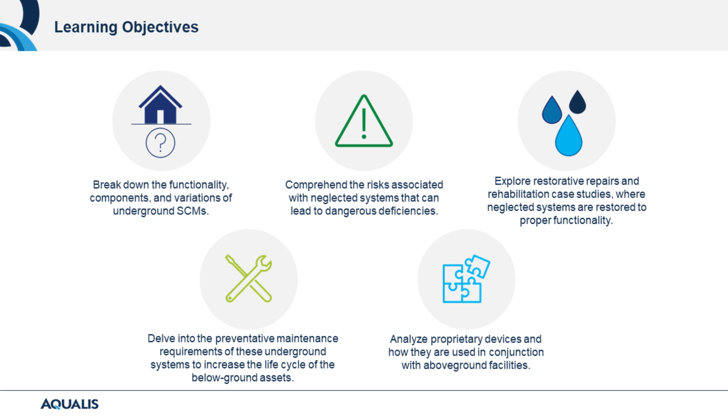As with all stormwater assets, preventative maintenance is essential to extending and preserving the life cycle of these underground stormwater infrastructures. So we will also discuss corrective maintenance, which tends to be a common practice for these neglected systems. And it would be impossible for us to talk about underground infrastructure without addressing proprietary devices. As I mentioned, we're going to walk through a case study that includes a neglected stormwater vault with the use of proprietary filter cartridges.

So we've established our learning objectives, let's go ahead and get started. In this next section, we're going to address industry standard underground SCMs and proprietary devices.

When we're looking at underground systems, we're going to discuss stormwater control measures that treat water quality and water quantity. Since there are so many variations of underground stormwater systems, this webinar could take the entire day, but we're going to briefly introduce a few of these systems and then dive deeper into maintenance and repair protocols.

There's more below the surface, and much like icebergs—we're going to refer back to this iceberg today—underground stormwater infrastructure provides more than what meets the eye.

In many cases, these systems are utilized in parking lots and roadway infrastructure, commercial, residential, and industrial properties, moving water from impervious surfaces and directing that runoff to these systems to manage peak volume, quantity storage, and slow water release. Essentially used in areas where property utilization isn't available above ground.

We commonly see this in the Northeast and highly densely populated areas. These solutions are very successful in treating not only quantity, but also the quality of stormwater runoff.

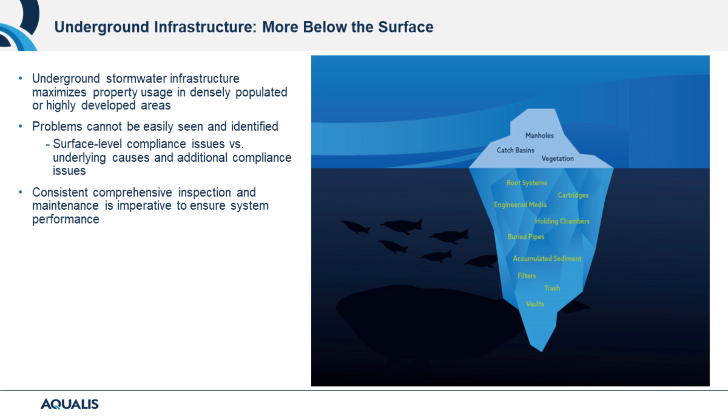Identifying these deficiencies before they develop into structural integrity issues ensures the life of the system and reduces environmental impacts and concerns.

Engineered underground SCMs offer flood control, reduced erosion, and groundwater recharge, and by slowly moving stormwater runoff from areas with densely impervious surfaces, this solution can move the water to slowly reintroduce it to the watershed.

These include large pipe systems which slow down and hold that stormwater runoff, commonly paired with proprietary devices so that water quality can also be treated.

We typically hear that underground stormwater infrastructure is only a solution for water volume, but solutions to hydrocarbon, phosphorus, and other heavy metals can all be treated with these proprietary devices, especially depending on the region and the pollutants that need to be targeted.

Underground SCMs filter, settle out, and separate stormwater pollutants that may be present. Sediment in catch basins settles to the bottom, and then filters remove those pollutants and slowly reintroduce that filtered water. Installed beneath parking lots, streets, and open spaces, these provide additional public safety and security in comparison to above ground stormwater ponds.

As mentioned in the previous slide, underground systems really do maximize the space below ground to minimize impacts to the land above, optimizing property usage. They're aesthetically appealing since these systems are found below ground and don't impact landscapes or design of properties.

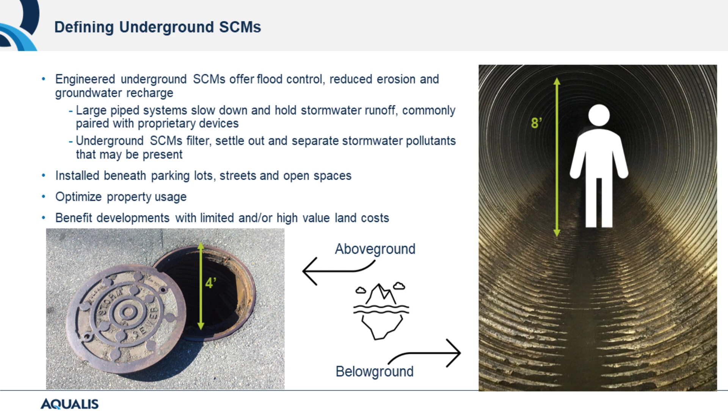These benefit developments with limited and/or high value land costs. From the picture, you can see the footprint is horizontal placement within 4 feet that is undetectable or causes minimal disruption to above ground land use, in comparison to 8 foot diameter corrugated pipes, where you see the actual scaled photo to the height of these pipes installed underground.

So, proprietary systems and devices. These are manufactured—either prefabricated or customizable—stormwater management assets, and the treatment devices can be categorized as either filtration or separation. Within the separation category, this can also be further broken down into chambered and hydrodynamic.

Later we'll talk through a hydrodynamic separation device as well as a filtration proprietary device. Permanent stormwater treatment products treat stormwater before discharging to another BMP, like large corrugated pipes, or to a body of water, and can be underground or surface level with underground components.

These off-the-shelf stormwater filtration products minimize engineering costs. These are tried and true methods for water quality treatment.

So they are a popular solution that ensures water quality is established to protect the local watershed. Within this process, working with engineers and regulators on the quantity of devices needed to capture that optimized result for pollutant removal is essential. It also preserves that high value land space like we talked about in the previous slide.

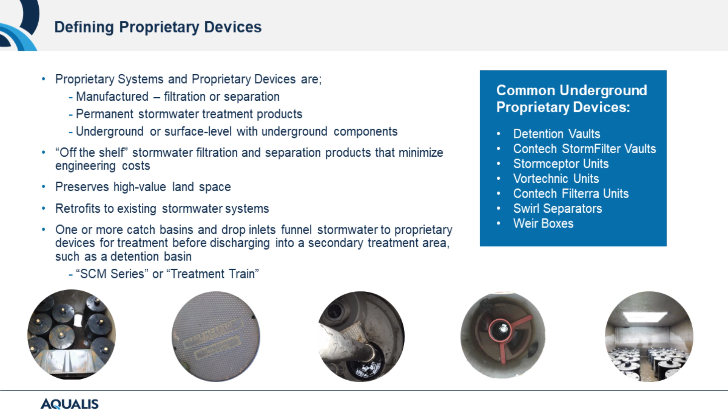These retrofits also apply to existing stormwater systems, so they can easily be installed to already existing infrastructure at a low cost but with high impact on water quality treatment. One or more catch basins and drop inlets funnel stormwater to proprietary devices for treatment before discharging into a secondary treatment area such as detention basins. These are what we call SCM series or treatment trains, all working in complete harmony to move stormwater and runoff and remove pollutants.

Underground and proprietary systems utilize a combination of both natural and engineering processes to manage or treat stormwater before it's released into the environment.

Back to that treatment train, as we just discussed, these systems aren't a one solution, but typically used in combination to ensure proper management of runoff, to avoid flooding, and treatment to ensure environmental quality standards and to further protect the watershed. Filter materials can include sand and natural filter mediums, manufactured filter mediums, hydrodynamic forces, and porous soils. But it's really important to note that the medium chosen is the best solution to treat the specific pollutant. This all depends on the region and the targeted pollutant you're trying to remove.

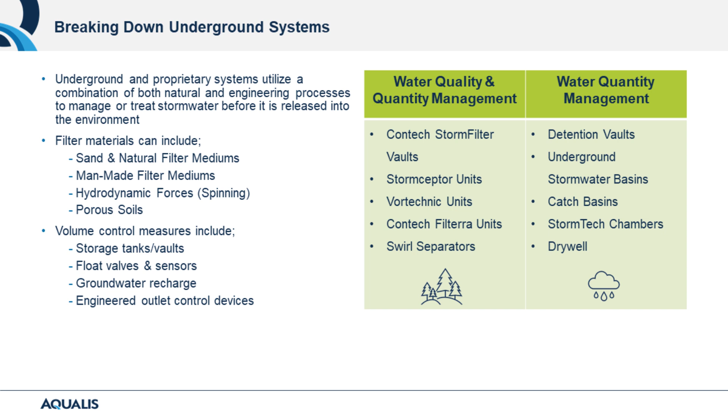Volume control measures include storage tanks and vaults, float valves and sensors, groundwater recharge, and engineered outlet control devices. Most underground systems, including those listed, do offer both quality and quantity management, but have one or the other as their primary focus and goal.

These systems take that flow of water underground through pipes, eventually to the pond or the watershed, and are usually found in parking lots and roadways. We do expect there's going to be normal wear and tear, as these systems are typically that first line of stormwater defense in parking lots, and with that we see a lot of failures.

The failures we see that decrease the life cycle of a catch basin include trash and debris, which blocks the function or proper drainage, and concrete and brick deterioration or mortar deficiencies. Stormwater can pass through the identified deficiency, saturating that outside soil, and then that soil can backwash into the catch basin, which ultimately causes a void, and that eventually causes a sinkhole.

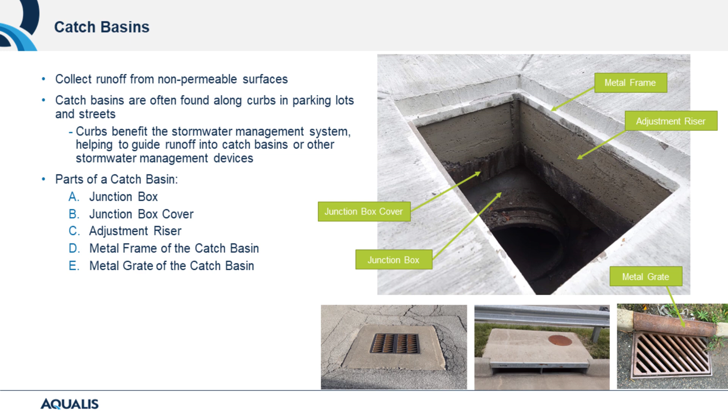The metal frame of the catch basin is used for support, and then the metal grate, of course, for the catch basin, which is the common look for the catch basin.

So we're now going to talk a little bit about detention vaults. So detention tanks or underground storage tanks, these are all utilized to store peak volume runoff flows and release the water at a slower rate.

Underground storage tanks can be made from concrete, steel, aluminum, or plastic materials. We're going to walk through a case study a little later on in the presentation regarding detention tanks and their common deficiencies, stemming from that lack of maintenance and inspections.

These systems are not designed to enhance water quality, and they're typically used with those proprietary devices to meet stormwater discharge quality requirements. These types of systems can have issues with weight restrictions like overcompaction, above ground weight from inventory staging, or large vehicle overpassing.

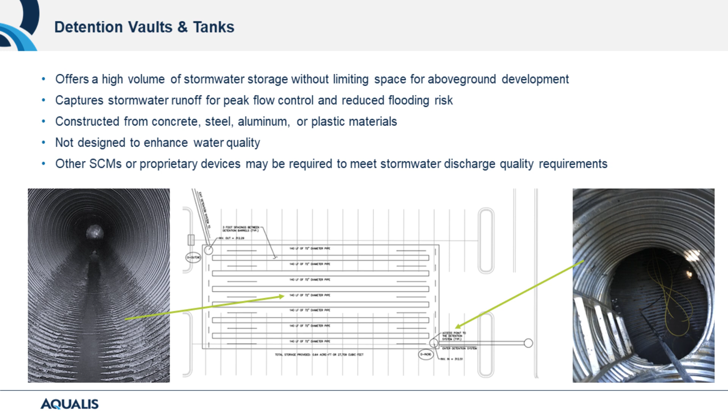Corrugated metal pipes are prone to rust and corrosion, and without proper maintenance, water pools and collects over periods of time, just due to sedimentation blockages, including joint issues as well.

So the proprietary filters, these are located within stormwater vaults or detention tanks. These filters house rechargeable media cartridges to target different pollutants like TSS, hydrocarbons, nutrients, and heavy metals. As I mentioned earlier, the media chosen really depends on the specific pollutant that's being targeted.

This includes natural or engineered medias. So these cartridges trap particles and absorb the pollutants. Float valves are housed in the center of the cartridges open once the cartridges are full of filtered water, releasing the water at a slowed, specified rate.

Preventative maintenance is essential here, preserving the lifespan of these systems, so that proper water quality is upheld and the treatment is targeted appropriately. Maintenance includes cleaning the vault and the tops of these filters, and depends on how well the areas above ground are really maintained to extend the life cycle of these systems.

Is street sweeping occurring often to prevent heavy sediment accumulation? Is the vault being inspected for increase in trash accumulation? These are all things to consider to ensure the life cycle of these proprietary devices.

In general, we expect 1 to 5 years of life expectancy, but they can be extended when proper preventive maintenance, which includes either vactor and jetting of the vault on a routine basis, really can help extend that life cycle.

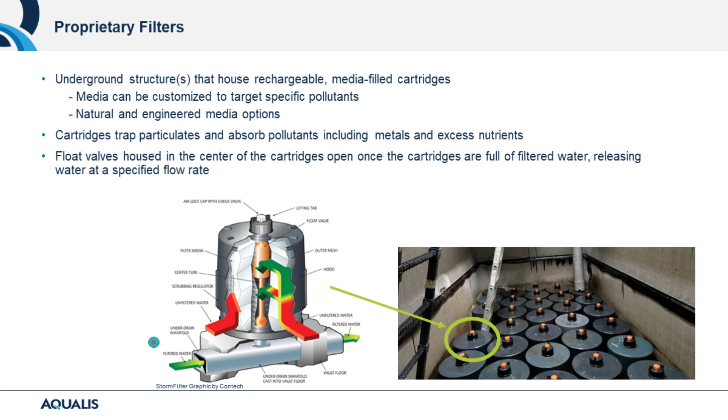I'm going to show this animation where this is showing as the water and the pollutants come into the filter, the pollutants remain, and the clean filter water is washed out.

So chamber units, or those hydrodynamic separators, provide effective solutions against pollutants in stormwater. They work by water bypassing the lower chamber to prevent disruption of previously removed sediment and petroleum that is accumulated within the lower chamber.

The free oil then rises and is trapped under the insert. The treated water then bypasses the weir during infrequent high flow periods while diverting sediments and floatables. Routine inspections ensure oil and sediment accumulation rates are monitored, and frequent vac truck cleaning removes those collected oils.

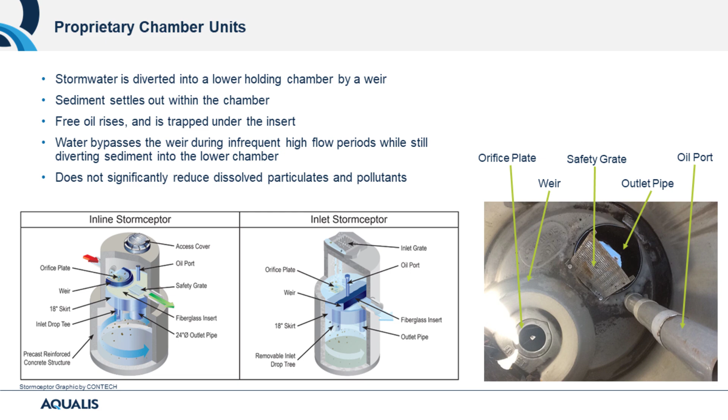So we'll go ahead and we'll show how the system works with animation. This is during normal operating conditions. The water flows in, and the larger oils and sediment are separated, the oil is trapped, and then the water swirls out to be removed to the outlet, to the rest of the treatment train.

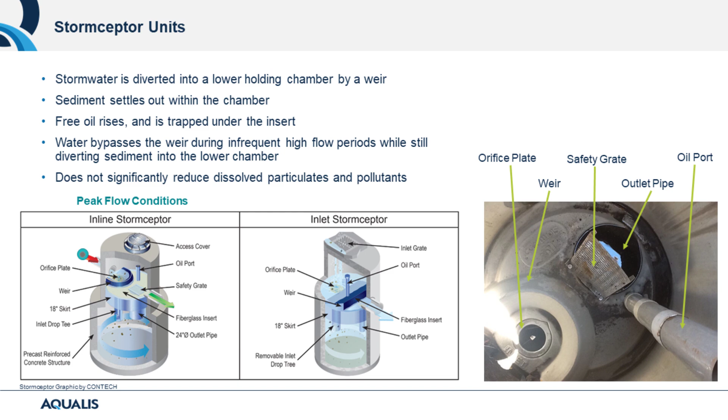Now we're going to show during those peak flow conditions. During peak flow, the water bypasses the lower chamber to prevent disruption of previously removed sediment and petroleum that has accumulated within the chamber.

Next we're going to address those implications of underground stormwater system neglect that we've talked briefly about. Referencing back to our iceberg, when problems reach the surface, it has likely been an issue for a while.

The out of sight, out of mind mentality is very prevalent with underground infrastructure, especially for those who may not be aware of the assets they are either required to maintain or that they own underground on their property. These assets are especially prone to failure, as areas of concern are challenging to identify by everyday visual signs. More often when in disrepair, it is extremely costly to correct.

Problems may only be noticed once they come to the surface, literally, like sinkholes, pooling of water, as we see in this photo right here.

An overall lack of awareness is a common factor we tend to see with these systems, like poorly maintained stormwater assets due to turnover in positions. We see this frequently in locations where the next manager isn't aware of the responsibilities that they hold. Deficient knowledge of regulations means there's unawareness of proper regulations or O&M agreements on their systems.

There's costly repairs required to get the system back to design function. Simply put, it's expensive to repair, and some just don't have the budget unless motivated by a compliance issue. So the property owner might not move forward with repairs until absolutely necessary.

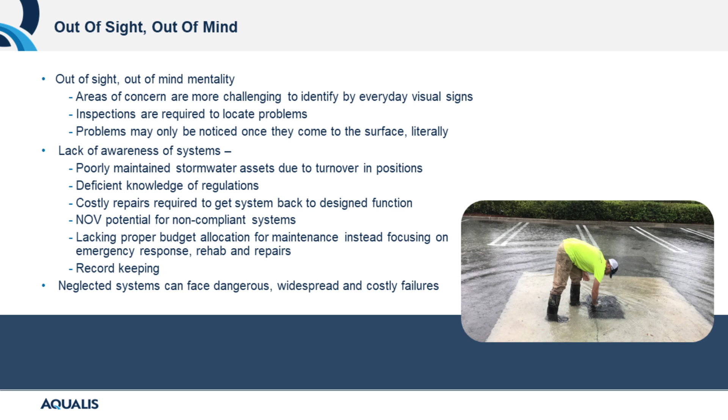Neglected systems can face dangerous, widespread, costly failures, so sinkholes and flooding, just to name a few, especially when you want your system to function as designed during historic rain events. Failures can quickly be exacerbated by the condition of the underground systems.

So, common signs of deficiencies. We've talked briefly, but we're going to break them down a little further here.

Buildup is especially visible in and around inlets and catch basins. Due to their design, this is where trash and debris is meant to build up, but if routine removal of trash is not upkept, the catch basin can be completely blocked, which ends up causing flooding. Hydrocarbons are commonly found in the catch basin, so proprietary devices can assist with capturing these oils and sediments, debris and trash—all clog-producing items that are easily treatable with routine preventative maintenance.

Cracking and settling does not always warrant further action, but it's important to monitor catch basins to ensure system function, safety, and compliance continue to be met.

Damaged piping is detectable with underground pipe camera inspections and preventative maintenance inspections by verifying proper water flow and sediment buildup. Many times, property owners are only alerted to this issue when there's pooling of water or sinkholes forming above ground.

Consistent bypass typically leads to bigger issues like sinkholes and water pooling, as the runoff is not reaching the water treatment cells.

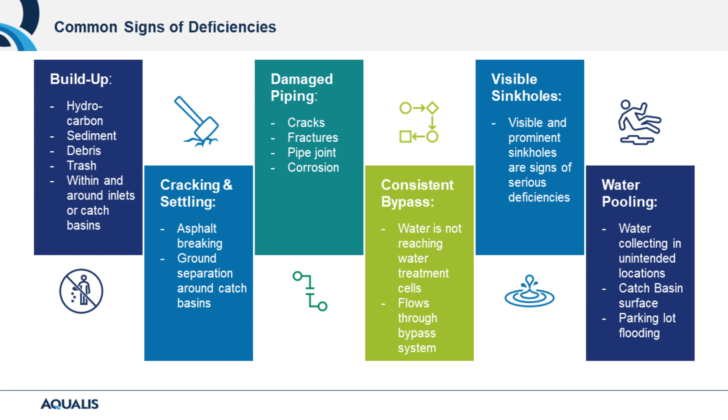Water pooling is usually indicated with flooding in parking lots or water collecting where not originally designed or intended. As we walk through each of our case studies, we're going to revert back to these deficiencies as the recognized defect or system failure.

Sinkholes require immediate attention, and as we addressed with the iceberg, when these reach the surface, it typically indicates a larger issue below. Collapsed subsurface hollows that appear as depressions in the ground surface, in which rainfall can drain, is a really good definition of sinkholes.

Water displaces the soil and creates this concave cavity. Structural defects involving piping or other below-ground stormwater infrastructure that has become defective are commonly the causes of sinkholes.

This includes legacy piping and aging infrastructure, which are at risk of failure or at the end of their life cycle. Underground infrastructure is at risk of creating sinkholes when pipes crack, fracture, or have structural failures.

Root cause analysis really needs to be implemented through underground video pipe inspections, either smoke tests, percolation tests, water dye tests, or geophysical studies or surveys.

When water escapes pipes and flows over surrounding rock structures, it erodes cavities that eventually collapse, and these also form sinkholes. Just as that cavity can form around a catch basin, that same process can occur around any piping with faulty joints, cracks, fractures, or an increase in compaction or weight.

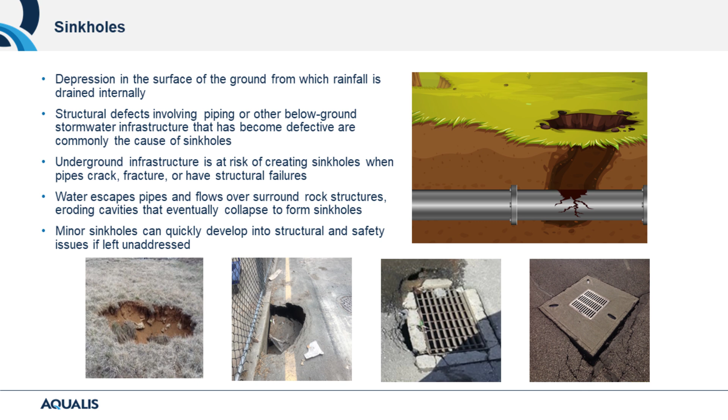We talked a lot about preventative maintenance, but we want to make a point to discuss corrective maintenance. This is a degree above preventative maintenance, when we need to take a site back to compliance, due to a length of time where the system has been neglected. Repairs and major restorations can be added into this category as well, but we're going to address repairs as its own category in the next slide.

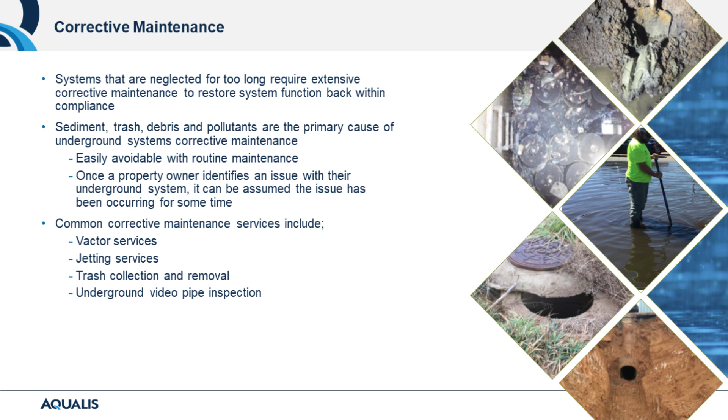Common corrective maintenance services include Vactor services, jetting services, trash collection and removal, and underground pipe inspection or CCTV inspections. We're going to break each one of those down in the next slide as well.

Additional to corrective maintenance, the following are solutions that diagnose, treat, and inspect underground systems. Underground pipe services—this technology can identify suspected pipe damages, operational obstructions like the accumulation of debris, sediment, root intrusions, and compromised systems with complete pipe collapse or serious defects. For preventative purposes, pipeline condition can also be verified, detecting minor defects due to installation, assessing overall pipe health, and ensuring the life of the underground pipe.

Vactor services—utilizing high suction power, these trucks collect and remove large volumes of debris of both wet and dry solids.

This can be used in combo with jetting to clean catch basins or vaults to remove accumulated sediment. So jetting services use high pressure water to dislodge sediment and clear compacted buildup. This solution is environmentally friendly and highly effective to clean and maintain underground systems.

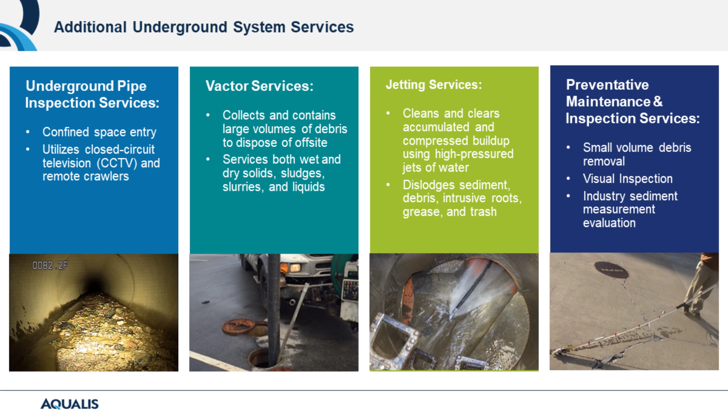Preventative maintenance and inspection services are management programs that provide routine maintenance on a monthly, quarterly, or even biannual schedule. This includes visual inspections, sediment measurement, evaluation, debris removal, and reporting deficiencies over time. Having a professional familiar with the system includes consistent photos over time to watch deficiencies if they're small and monitor them should a repair eventually be needed.

Underground repairs are essential, and even with routine maintenance they can be inevitable. This can be due to aging infrastructure, even human error such as damage from cars or vendors lacking knowledge of these systems, which is one of the case studies we'll talk about soon. When corrective maintenance is not sufficient, restorative or rehabilitative repair can then be applied.

Repairs include pipe replacements, pipe lining repairs, structural repairs, and sinkhole repairs, which we can break down into rehabilitative and restorative. Restorative repair consists of a variety of isolated or small-scale maintenance work needed to address operational problems, so simple grate or drain replacements and even Vactor work can fall into this area.

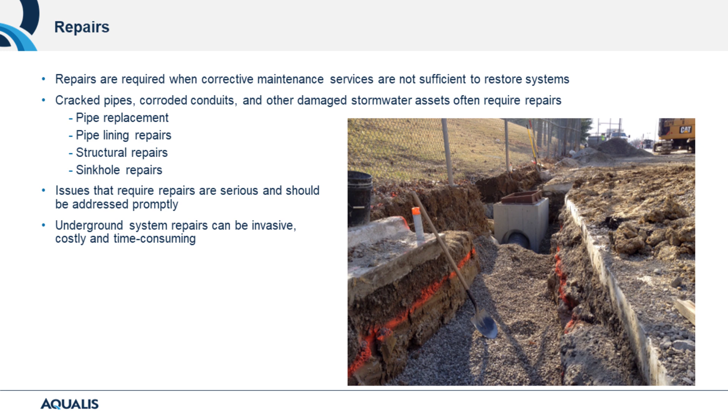Rehabilitative consists of large-scale maintenance and major improvements needed to address failures within stormwater management facilities. This work may require an engineering design with construction plans prepared for review and approval, specialized maintenance equipment or surveying, construction permits, or assistance through private contractors and consultants. In general, if large equipment is required to work underground, this repair is probably rehabilitative. As with any deficiency in underground systems, these need to be addressed swiftly to preserve the entire SCM treatment train's performance.

Now it's time to dive into some real-life examples that include restorative repair, rehabilitation, and corrective maintenance.

This is a great example of ensuring preventative maintenance has been provided, but human error interfered and resulted in a major rehabilitation project. This site repair is in Florida and still in progress, but the stormwater vault ceiling was damaged by a parking lot vendor who went to repair and replace a portion of the asphalt. Unfortunately, the vendor didn't refer to the site plan or the multiple weight limit signage on site that would have indicated something was going on underground at this retail location.

The vendor ultimately drilled holes into the vault, altering the structural integrity, thinking it was control joints. The site had to be blocked off as engineering and city officials coordinate to ensure the repair is appropriately addressed. Issues currently facing this location include that it's rainy season in Florida, and we need that vault to be dry to begin work, as well as getting our hands on precast construction materials.

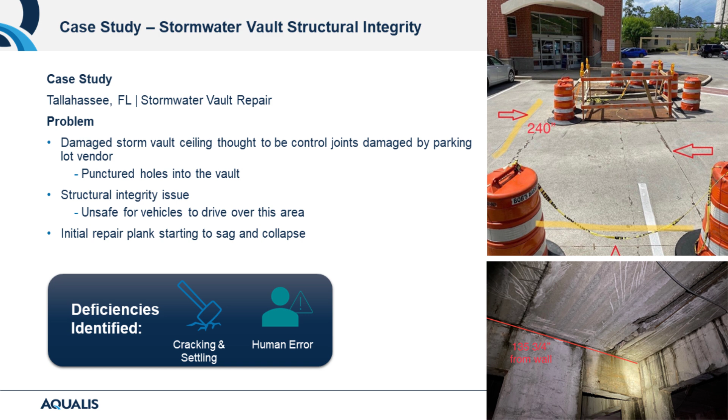We really thought this was a timely case that came up as we were organizing this PowerPoint, and found it essential to showcase how missing education about these systems can cause major deficiencies in underground systems. Even when you do everything right, sometimes it doesn't matter, like in this case—so it's not only out of sight, out of mind for property owners, but for all vendors working in and around these systems as well.

This next case study is one from Arizona that we currently have in progress as well. Due to the nature of the geography and topography in Arizona, above ground real estate isn't adaptable to stormwater infrastructure, and ponds just aren't as prevalent in that region. Since rain is infrequent, these systems are 20 to 25 years old, made of corrugated pipes and deep dry wells, which are developed to send water right back to the water table by reaching permeable soil where it can infiltrate back into the soil. In fact, Arizona is one of the states with the largest dry well programs, with over 52,000 throughout the state.

But the site experienced a lack of maintenance for quite some time, so sediment was not flowing out appropriately and water began to pool and remain in the pipes, causing corrosion and the pipes to eventually rust out. The water was bypassing and infiltrating the surrounding material, ultimately causing a sinkhole, and the weight gave way to a complete collapse, as you can see in that photo here.

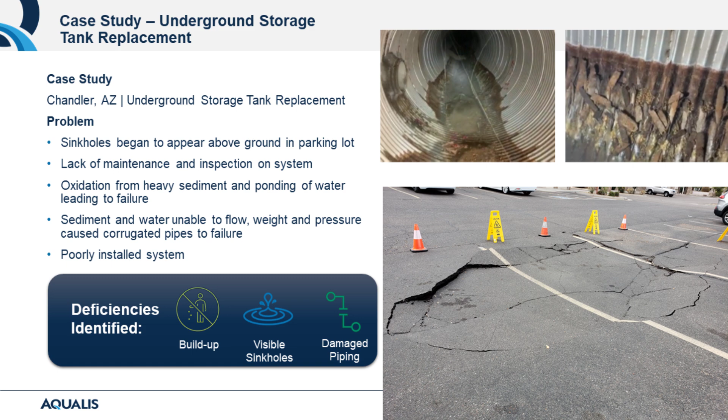Deficiencies identified here include that buildup, visible sinkholes, and damaged piping. The top of the photo showcases oxidation from water pooling, and the bottom photo displays the sinkhole that's on site.

So the solution to this one includes a major rehabilitation of the system, and it also comes at a high expense. The storage tank system includes 130 linear feet of 8-foot diameter corrugated metal pipe, which is all being replaced. The system received new bulkheads, risers, and storm grates as well. Proper compaction below and above the system is being calculated to ensure the life and integrity of the system.

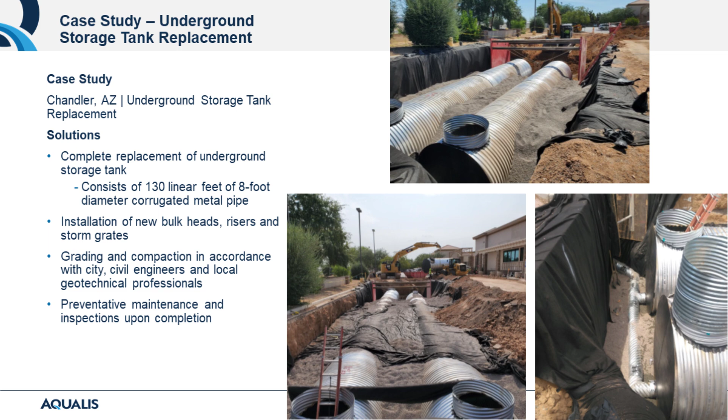Additionally, the same issue is occurring in the neighboring property, in which a car actually fell into the sinkhole this past week. So this case will be completed in the next month or so, and following that we'll provide routine maintenance to continue to monitor this brand new system.

So this was a site we were contracted to perform a routine inspection. During the inspection, the stormwater team found a Contech StormFilter vault and quickly assessed it to be out of compliance with manufacturer guidelines. It was likely functioning in a bypass mode, or not operating such that water quality and quantity rates were being achieved.

Our inspectors observed significant sediment and debris up and around and on top of the filters located inside this underground system. The manufacturer recommends that these cartridge replacements should occur at the 1 to 5 year cycle, depending on the results of the routine inspections.

So we were able to rehabilitate the storm filter vault back to a functional and effective state. This includes a vacuum and pressure washing service performed on multiple systems, including the stormwater filter vault pretreatment, storm gate structure, inlet, outlet bay, and cartridge bays.

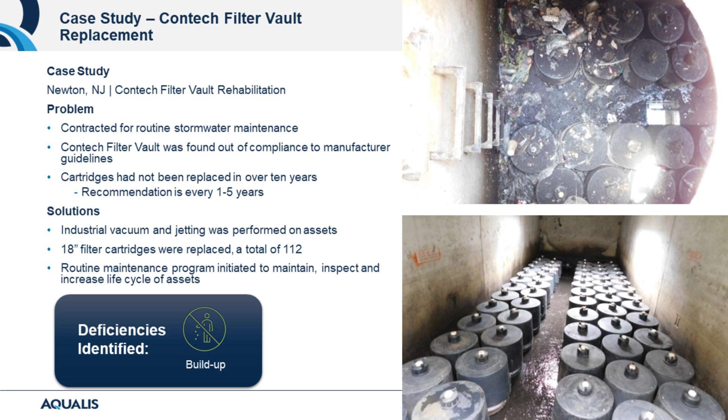All of the 18-inch filter cartridges were replaced, a total of 112 of them. The under drain manifolds were inspected and jetted with water reclaimed as needed. All reclaimed material was then disposed of at an approved off-site facility.

So this is a recent completion we did in Raleigh, North Carolina. These are the before photos you're looking at right now. Two sinkholes formed in a drive lane above large diameter conduits at an apartment complex. These pipes are designed to guide stormwater runoff, and they faced years of wear and showed signs of extreme corrosion that inevitably led to a displaced retaining wall.

No longer adequately set, stormwater was misguided around the outside of the conduits rather than through them. These compromised pipes led to the destabilization of surrounding surfaces, and stormwater erosion created pockets of subsurface caverns, also known as sinkholes. Eventually the road above these hollows became so weak that it imploded, and those sinkholes were ultimately revealed, as you can see in those top two photos.

AQUALIS engineers performed cast concrete pipe lining repair on the pipes, as the pipes were still in a really healthy condition. Using this technique, professionals created a 1.5-inch concrete pipe within the existing conduit. This process sealed the pipe from further damage and increased the stability of the conduits to prevent additional stormwater from being diverted around the pipes.

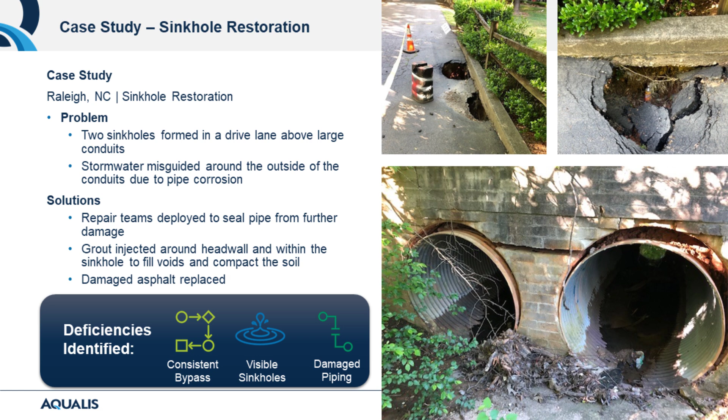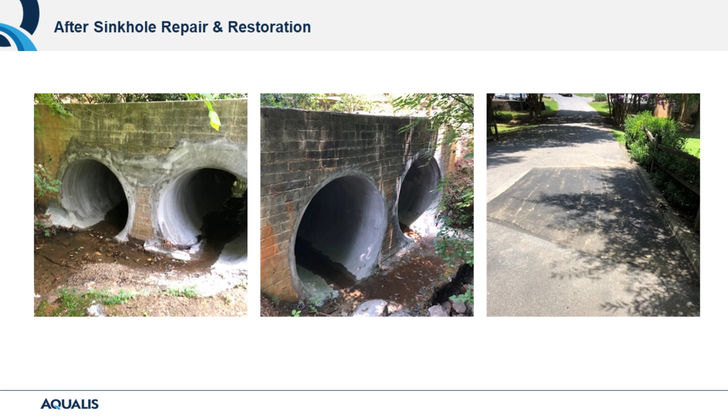So you can see these are the completed photos with the completed repair, with the sinkholes filled and repaired, as well as the concrete head wall repairs. The water is now able to flow as designed.

As we highlighted the owner responsibility throughout this presentation, in this next section we're going to explore in more depth the expectations and responsibilities of property owners.

System operation and compliance includes routine maintenance. If a property has O&M agreements, these guidelines provide the accurate and outlined maintenance schedule for the systems. Inspection, at a minimum, local regulations require inspection of the system to ensure the SCMs are performing as designed and protecting the local watershed from increased pollutants.

Repairs address the restorative and rehabilitation type repairs that are expected through the life cycle of these systems. Record keeping, going back to routine maintenance, ensures that O&M agreements are met, documented, and that inspections remain essential.

Notices of violation: communicating with the stormwater professional who can communicate on the property owner's behalf to local regulators to ensure proper documentation and protocol is followed. This includes correcting these violations within deadlines. Again, back to that communication part—if a large rehabilitation is needed, the time frame for completion may not meet that violation deadline, so this is all essential to communicate and work with a trusted provider.

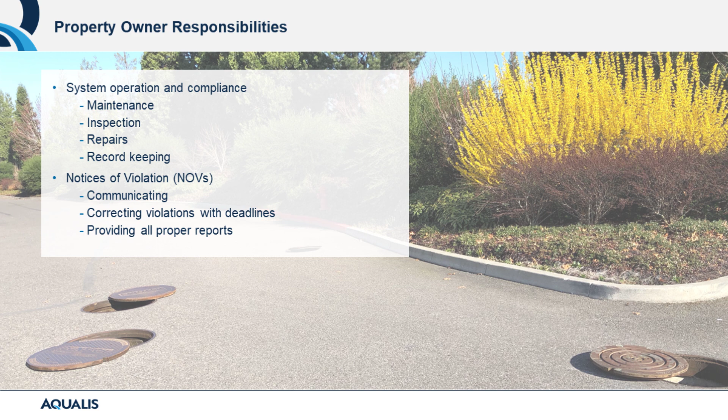And then providing all proper reports. So all communication is essential to not ignore any type of fine or violation.

As we circle back to preventative maintenance, ensuring these four are met will help extend the life cycle of underground infrastructure. Starting with inspections—these help evaluate the condition of most underground systems by monitoring the level of water, oil, sediment, and trash. Ports and access points are used to collect material for samples and measurement. Confined entry is not always required to inspect these systems, but sometimes it is, and proof of maintenance must be available upon request during these inspections.

Trash removal and accumulation is an important part of routine preventative maintenance. Floating debris is removed during this process, and this helps reduce the chance of clogging and possible restoration or rehab costs.

Sediment evaluation uses an industry tool to measure sediment and depth, helping to indicate a level that is acceptable versus a level that is actually out of compliance. Routine measurements can also alert to small changes in the system to investigate with underground inspections as well.

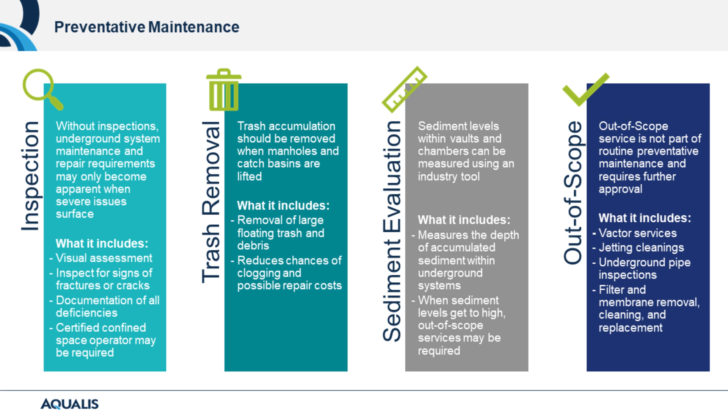And then out of scope—these are items not part of routine preventative maintenance, however they can be included in service agreements depending on the type of system. In some regions, catch basin cleanings via Vactor and jetting are actually required annually.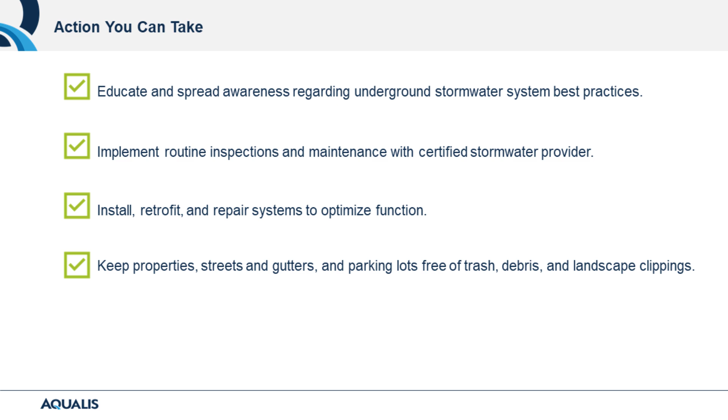Implementing routine inspections and maintenance with certified stormwater providers. Install, retrofit, and repair systems to optimize function. Keep properties free of trash, debris, and landscaping clippings. So it all comes back to that education portion, which is so important in making sure your system is staying healthy and functioning properly.

As we close, I want to briefly cover the future of stormwater in regards to technology. As we discussed aging underground infrastructure, we have to look to technology to help provide insight into these systems underground. So how do we use data to drive our next steps in stormwater? With information within reach always, it's time to adjust how we approach aging underground stormwater infrastructure.

How can we capture a full picture of how stormwater is managed in systems with the use of technology? We can use data from sensor technology to understand how best to rehab or retrofit to meet new capacity needs, and enhance future stormwater design to meet new capacity requirements. Overall, data allows us to make better budget decisions, prioritize repair projects amongst multiple SCM assets, and identify failures or flooding potential, all before extreme weather events occur.

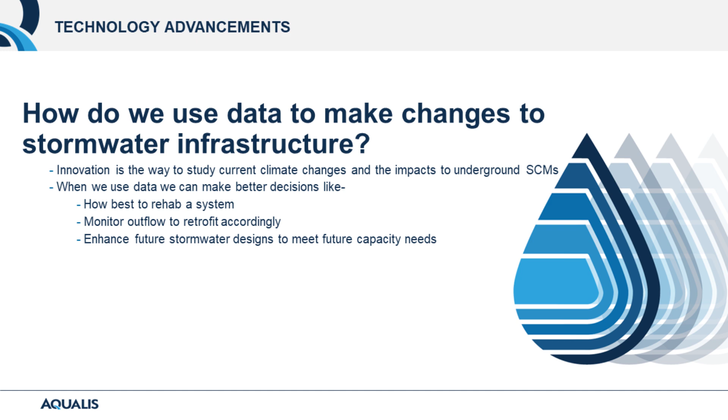As with most industries, technology is an important resource for capturing data and improving systems, and it's available in stormwater. AQUATRACKS is a cloud-based network sensor that monitors the health and status of SCMs in real time, all within a dashboard accessible from a desktop or mobile device. These systems allow for monitoring across multiple geographies.

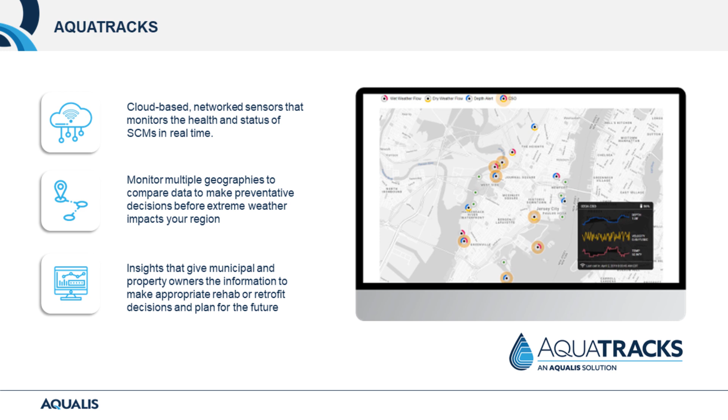This compares data to make preventive decisions before extreme weather impacts the region. The system includes weather forecasts and alerts to prevent any major catastrophe to the system before it occurs. So insights provided by the sensor system give municipal and property owners the information to make appropriate rehab or retrofit decisions and planning for the future.

This is a view of the dashboard, provided to users with key data points that can assist in monitoring systems. The system monitors water temperature, which can assist in monitoring systems prone to impacts from thermal pollution. Total outflow gives an overall health assessment on the system and whether it's functioning as designed. Total precipitation shows how accurate precipitation impacts the system through outflow, and total capacity monitors capacity and receives alerts when at critical levels that would require intervention.

So the system gives you a holistic view to make decisions on how to prioritize repairs, alert maintenance crews on potential needs for monitoring, and overall provide data that can assist in making decisions for properties or projects. The technology surrounding these sensors will continue to improve and advance to further meet the needs of municipalities and property owners, and further protect the life cycle of these underground systems.

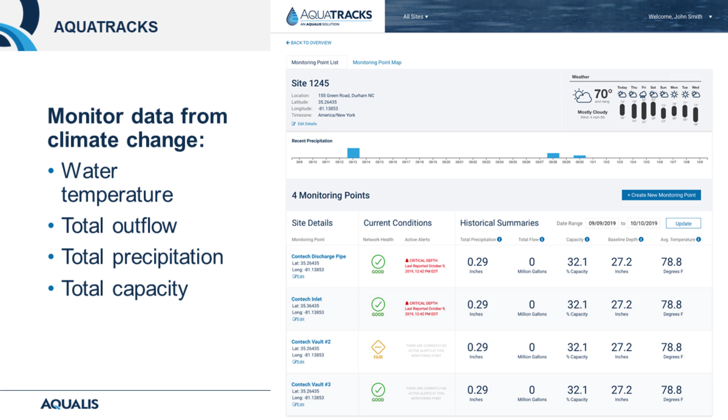AQUALIS is the leading nationwide provider of stormwater and lift station management services. These services include preventative maintenance, corrective maintenance or repairs, retrofit and redesign, as well as emergency response.

AQUALIS helps protect your assets, mitigating notices of violations on stormwater control measures, diminishing flooding risks, and supporting efforts in environmental stewardship. We partner with retail, commercial, industrial, municipal, healthcare, hospitality—you name it—across industries.

We service single-site and multi-state organizations through our preventive maintenance programs. We are an organization with over 20 years of experience in water resource management, providing innovative, leading-edge solutions to meet budget constraints and exceed compliance expectations.

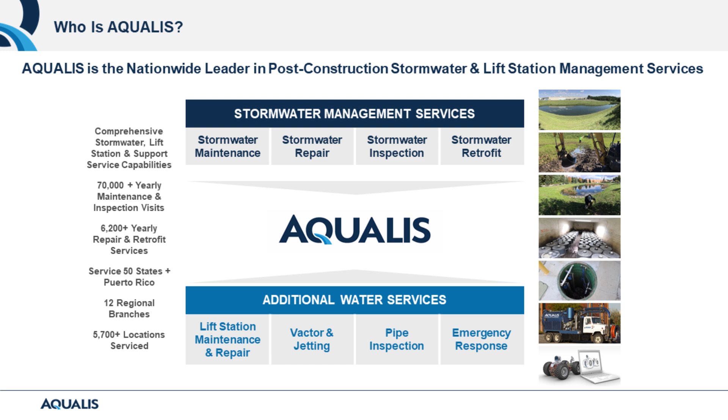We have programs that ensure quality, like our quality assurance program. We strive to deliver an exceptional quality and raving fan experience.

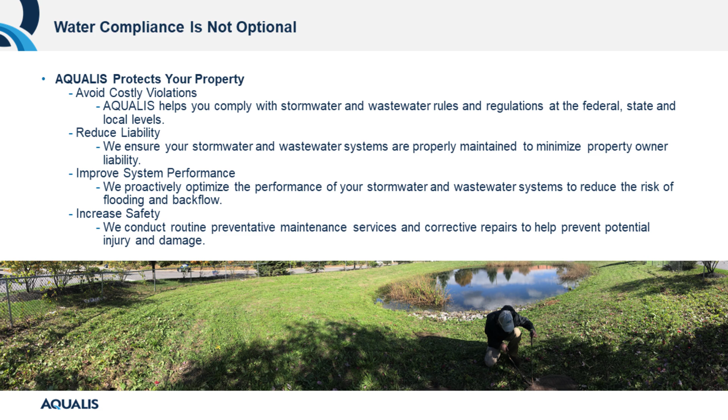As the leader in stormwater and lift station management, we are pleased to partner with and educate property owners on the importance of preventative maintenance and water compliance. With the AQUALIS preventative maintenance programs, we can help building owners and facility managers avoid costly violations, reduce liability, and improve system performance and increase overall property safety.

We are a team that prides ourselves in safety, compliance, and education. Our teams are highly specialized in their fields, from stormwater inspectors to certified confined space training. Our certifications include state-level certificates where applicable, as well as product-specific certifications to properly install and manage these stormwater assets, like those proprietary devices we talked about today.